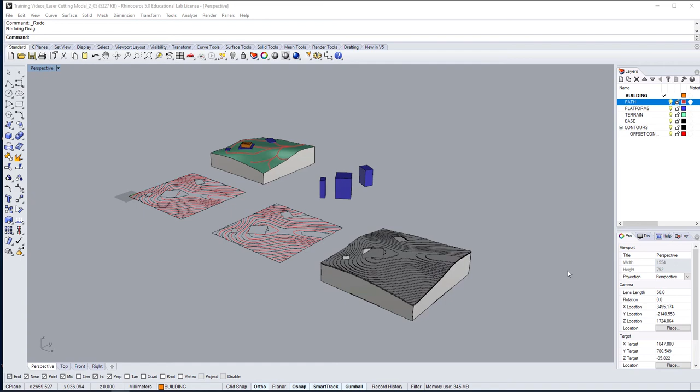While we have the contour curves already laid out in 2D, we still need to create the cut profiles for the support base and platform inserts. In this video, we are going to use two different methods to generate the line work we need from each poly surface in preparation for laser cutting.

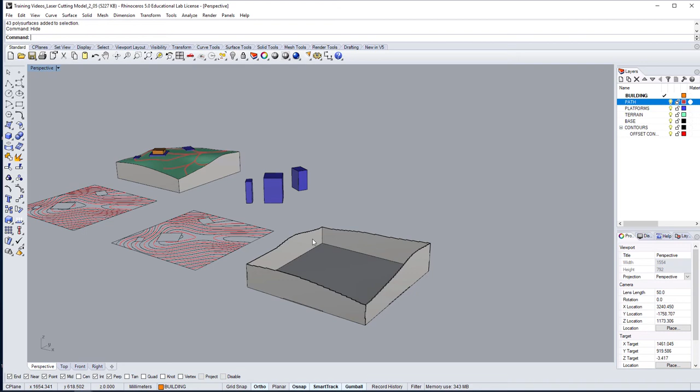The first method, which we'll use for the notch support base, quite literally takes each of the poly surfaces and rotates them horizontally in the XY plane before generating line work to create the cut profiles. Begin by selecting one of the vertical support poly surfaces, and in this instance I'm going to use the gumball to rotate each one. If you don't have this turned on, simply click the gumball button down the bottom.

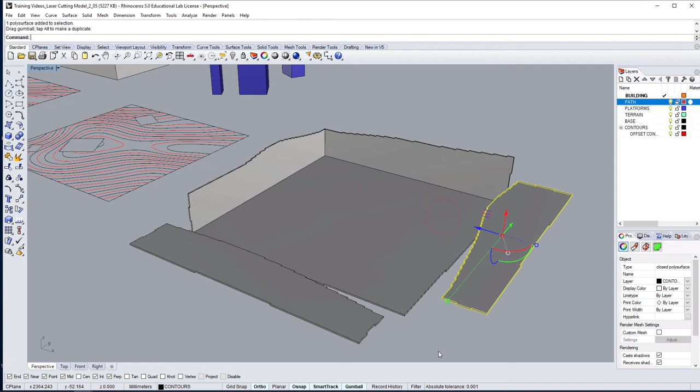Now, identify the direction in which the poly surface needs to be rotated, ensuring the outside face is turned upwards, as this will be the side we wish to have the nicest finish after being laser cut. Click on the rotation axis and type either 90 or -90 depending on the direction you need to rotate each poly surface. Do not worry that these poly surfaces aren't flat on the XY plane yet.

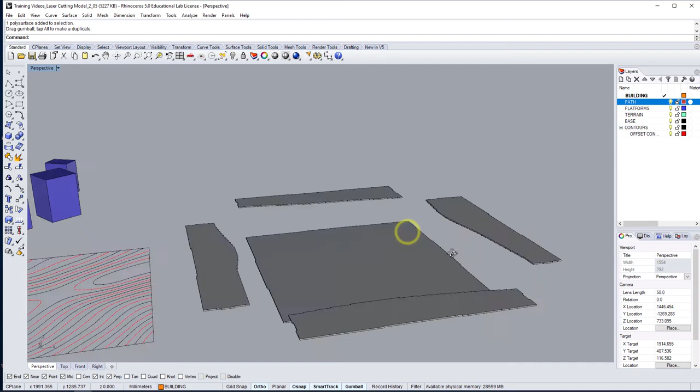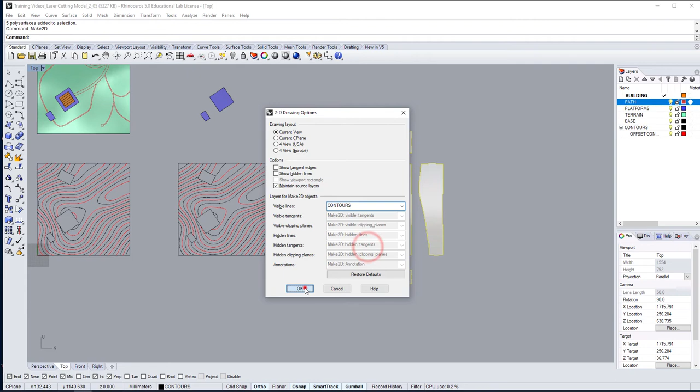Once you have rotated each of them, leaving the horizontal base piece as is for obvious reasons, go to the top viewport and select all of them. Use the Make 2D command to generate cut profile lines that will be flattened in the XY plane, ensuring the current view is selected. This line work will be generated at the origin and ready for bringing into the template file.

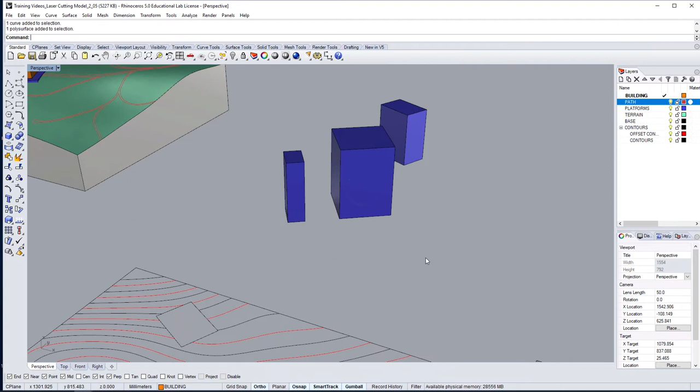The second method will be to unroll the open platform poly surfaces, where we have joined zero thickness surfaces resembling a folded box with an opening at the bottom. Select one of them and type Unroll Surface. Make sure that Explode is set to No in the command line. A flattened joined surface will be generated at the origin. Use the Duplicate Border command to generate the cut profile.

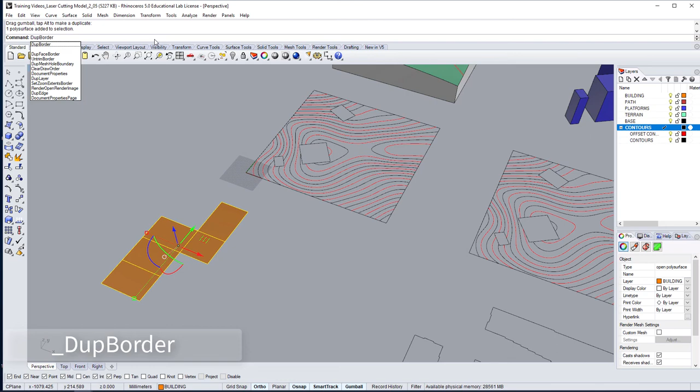Finally, switch to the Offset Contour layer and trace the internal fold lines, then delete the unrolled surface. Repeat this process for the two remaining platform boxes.

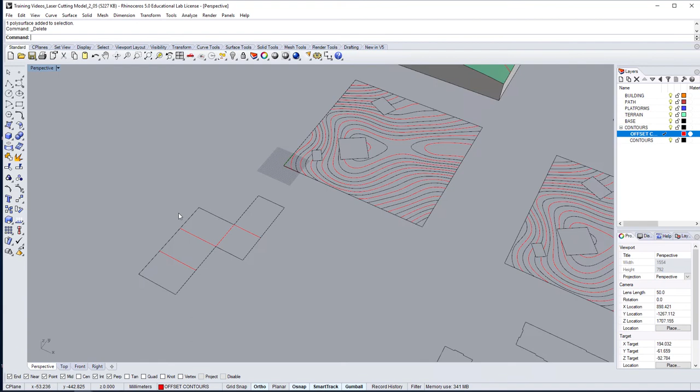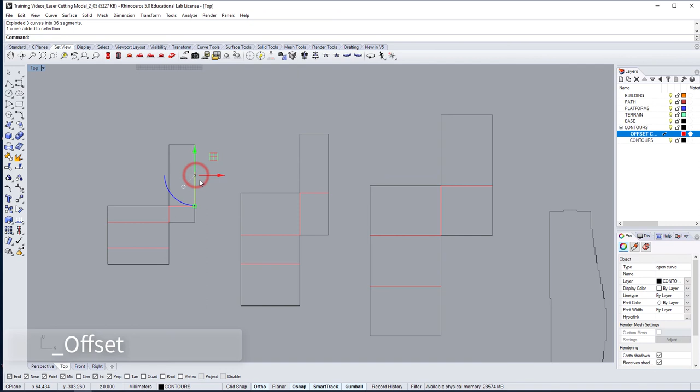The final step to this process will be to create gluing tabs on each of these edges for when we assemble them after laser cutting. Firstly, make sure you have exploded the cut profile. Next, we will offset each of the curves where we wish to create tabs. In this instance, I'm going to offset 5mm, making sure the original input curve is not deleted.

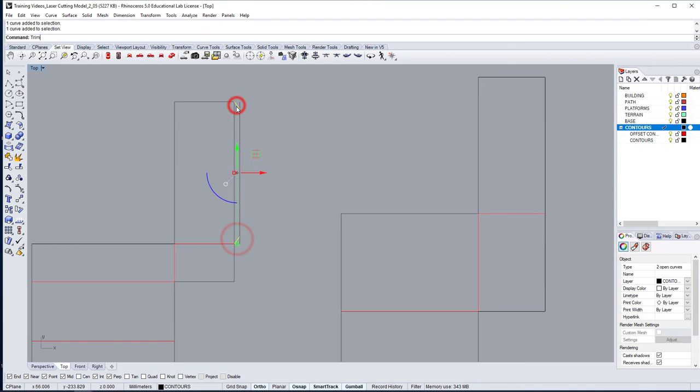Lastly, draw angled lines at 45 degrees to rejoin the outer cut profile, and change the original profile line to the Offset Contour layer. Once all of the tabs have been created, we are ready to bring the line work into the template file.